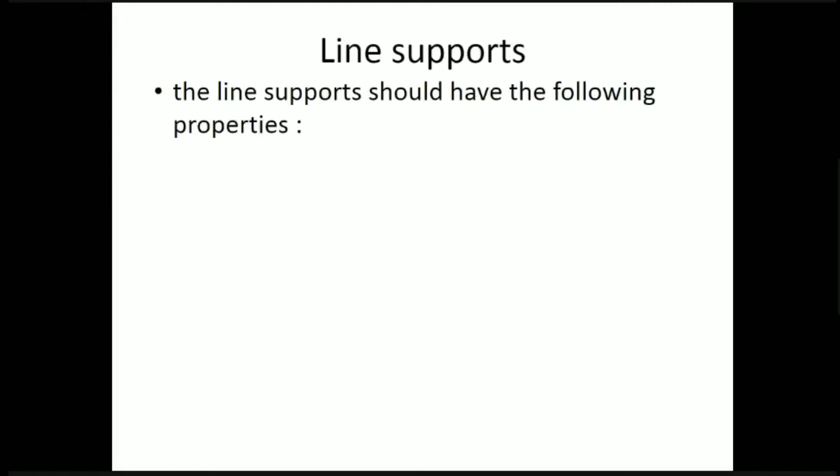Supporting structures are used for supporting the conductors in transmission as well as distribution system. The line supports should have the following properties.

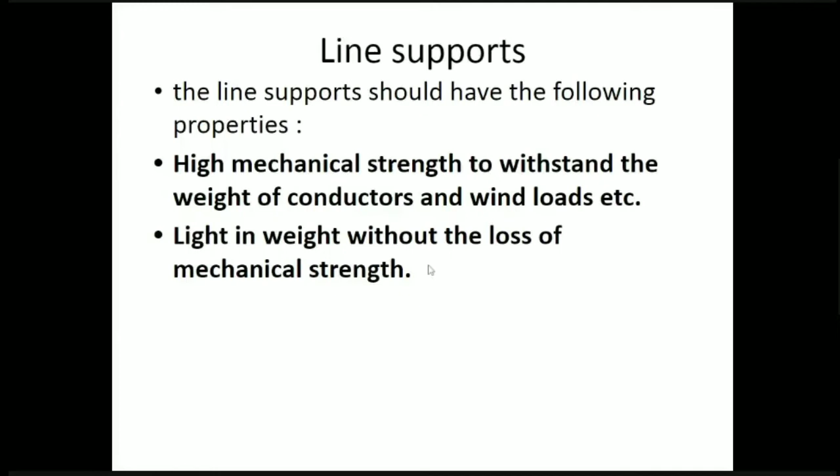High mechanical strength to withstand the weight of conductors, wind loads, insulators, etc. They should be light in weight without the loss of mechanical strength. They should be cheap in cost and economical to maintain. They should have longer life. They should be easily accessible for the maintenance of conductors. They should be good looking, with low maintenance cost.

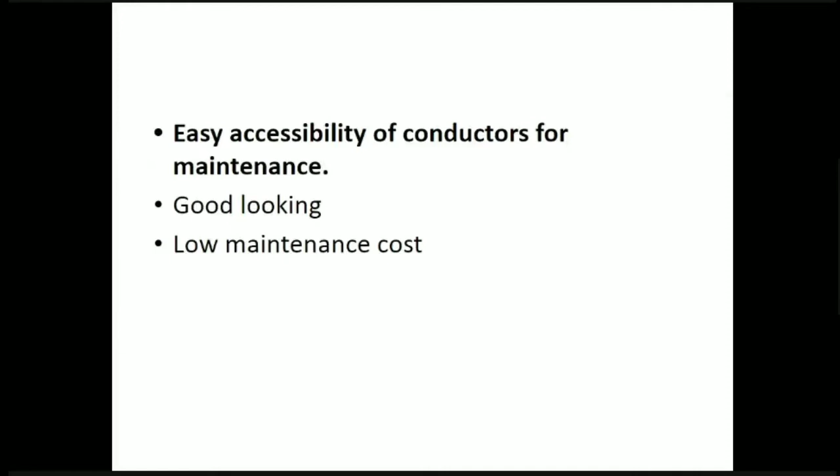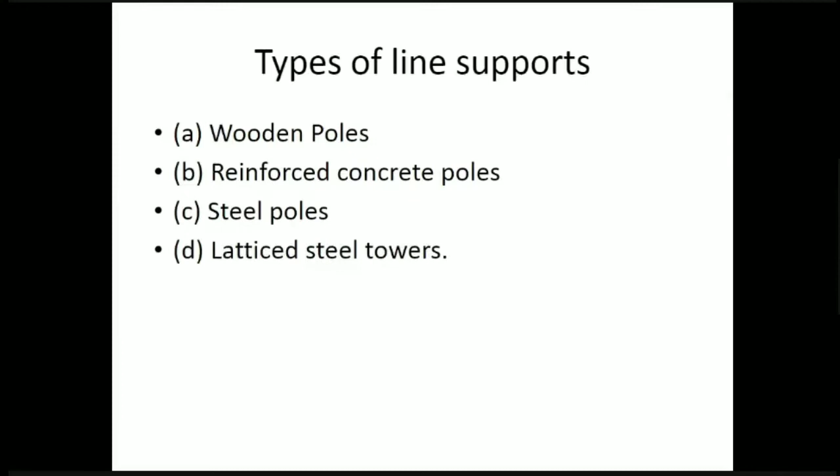And types of line supports. There are different types of materials used for line supports. First of all, wooden poles made up of wood. Then reinforced concrete poles, steel poles, and latticed steel towers.

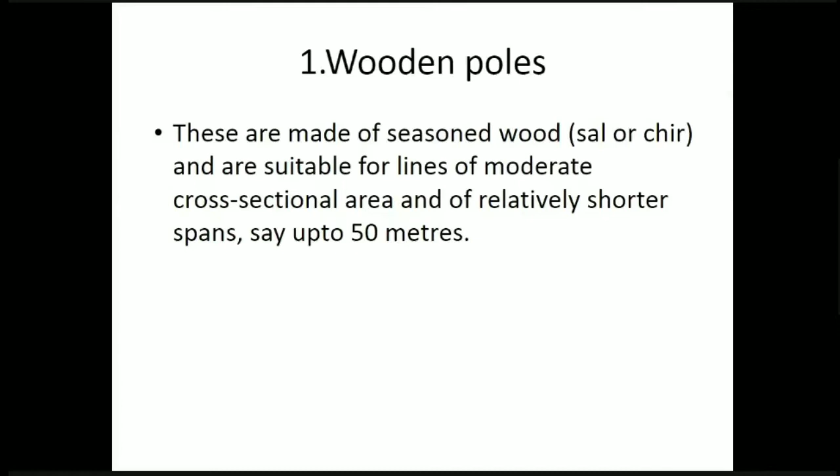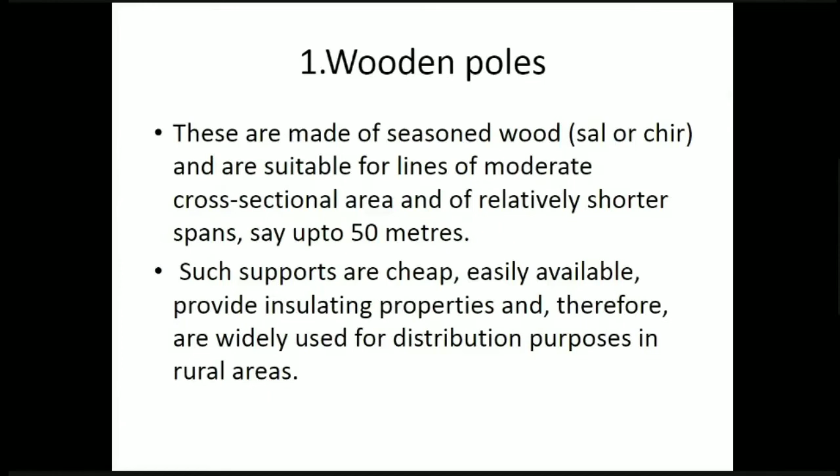First we shall see wooden poles. These are made of seasoned wood and are suitable for lines of moderate cross-sectional area and of relatively shorter spans, say up to 50 meters. Such supports are cheap, easily available, provide insulating properties, and therefore are widely used for distribution purposes in rural areas.

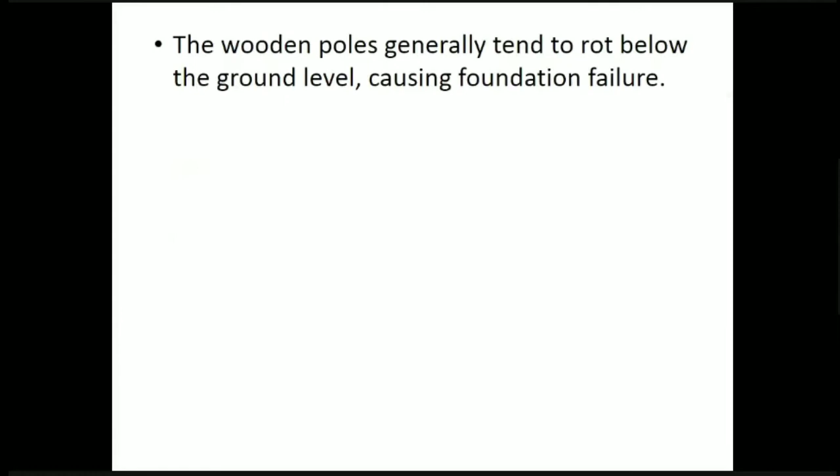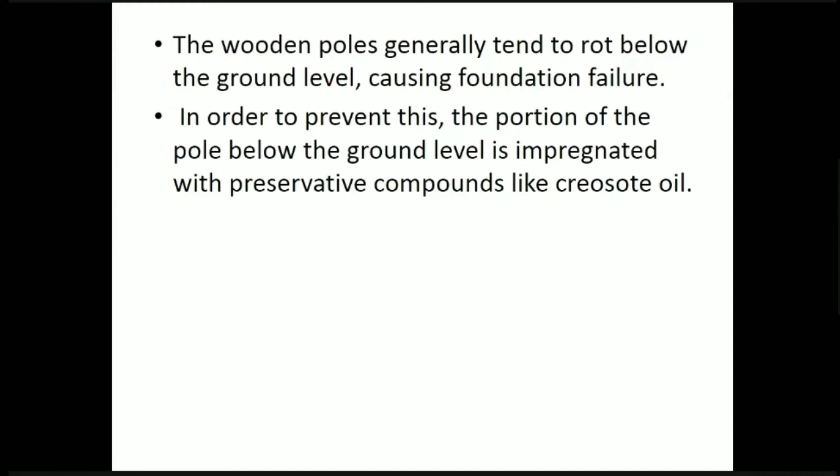The wooden poles generally tend to rot below the ground level, causing foundation failure. In order to prevent this, the portion of the pole below the ground level is impregnated with preservative compounds like creosote oil. Double pole structures of the A or H type are often used to obtain higher transverse strength than single poles.

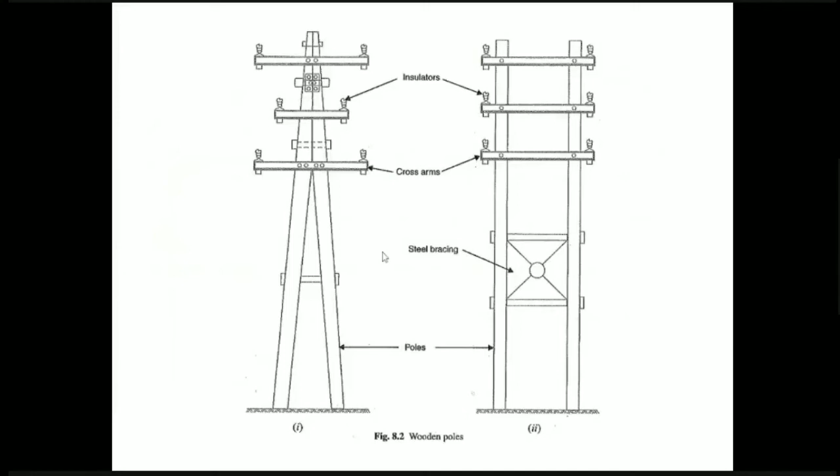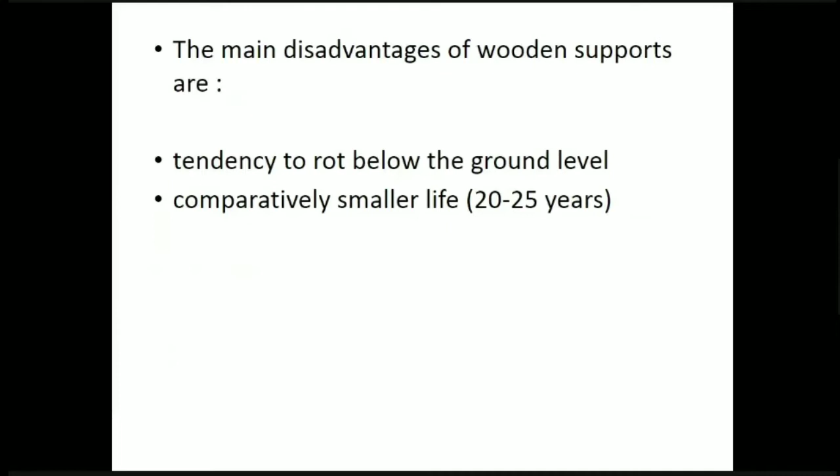The main disadvantages of wooden supports are the tendency to rot below the ground level, comparatively smaller life of 20 to 25 years, cannot be used for voltages higher than 20 kV, less mechanical strength, and they require periodic inspection.

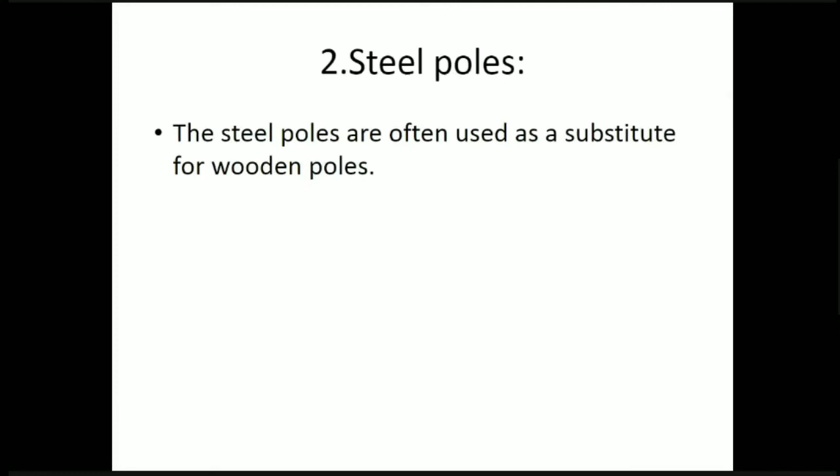The next type of poles is steel poles. The steel poles are often used as a substitute for wooden poles. They possess greater mechanical strength, longer life, and permit longer spans, that is from 50 to 80 meters.

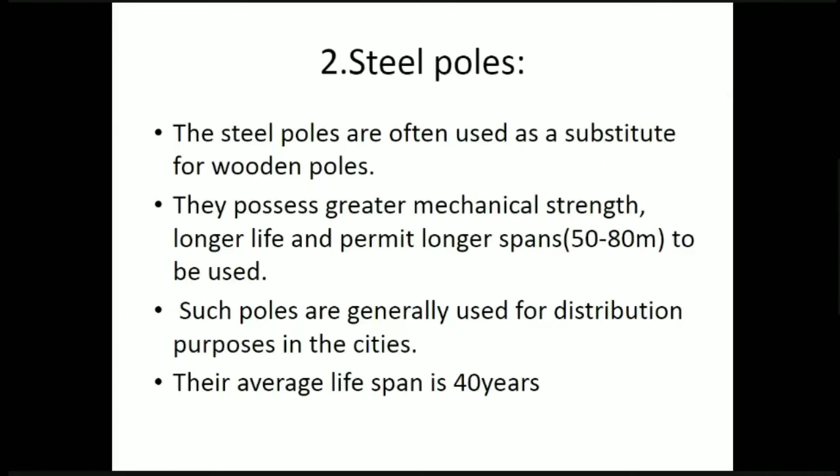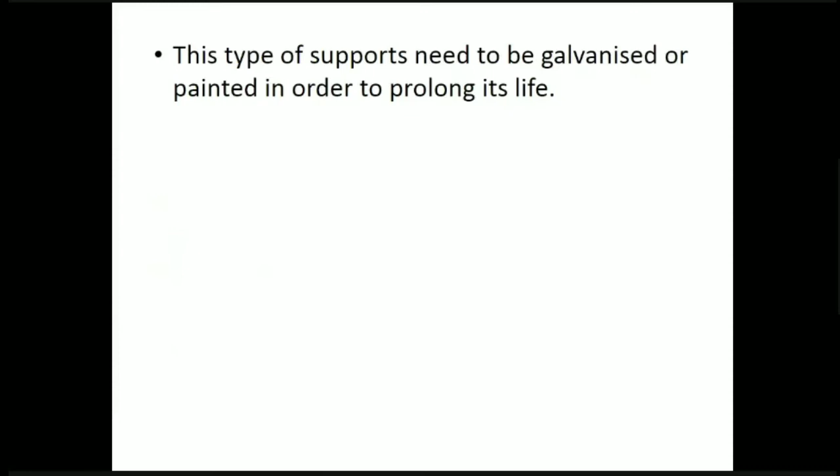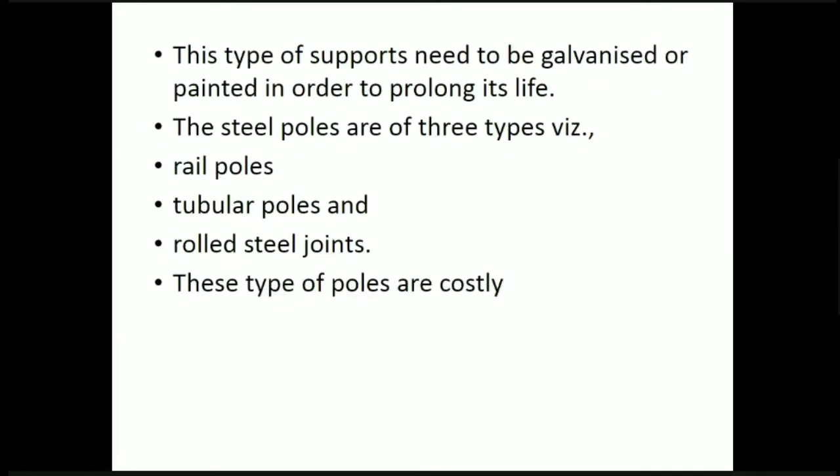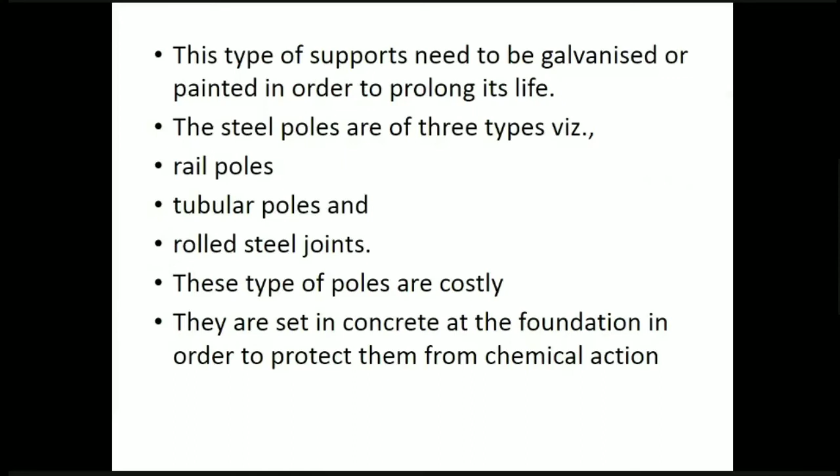The steel poles are of three types: rail poles, tubular poles, and rolled steel joints. These types of poles are costly. They are set in concrete at the foundation in order to protect them from chemical action. Below the ground level, the concrete may get damaged, so in order to protect that, concrete foundation is provided.

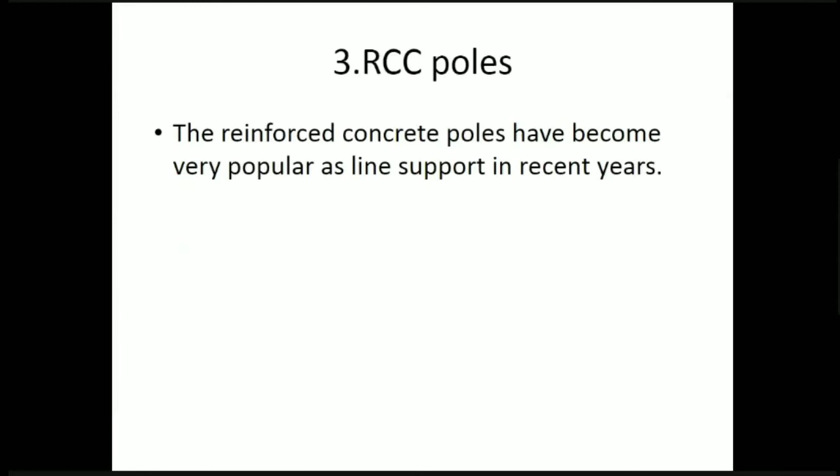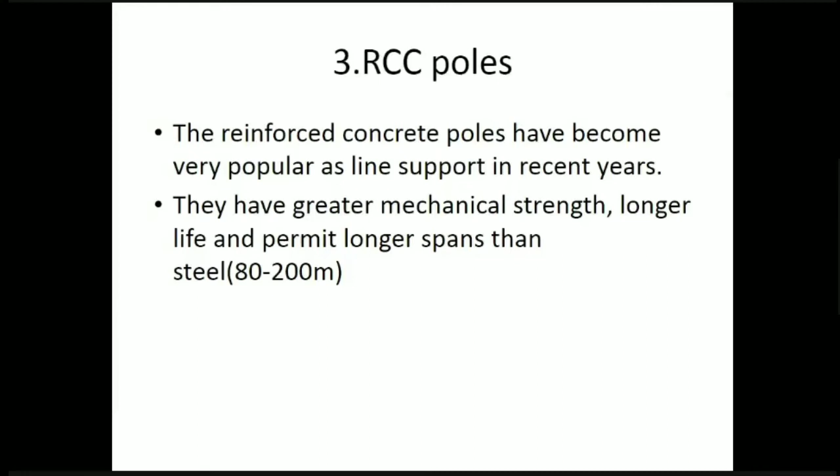The third type is RCC poles, reinforced concrete poles. They have become very popular as line supports in recent years. They have greater mechanical strength, longer life, and permit longer spans than steel, going from 80 meters to 200 meters. Moreover, they give a good outlook, require little maintenance, and have good insulating properties.

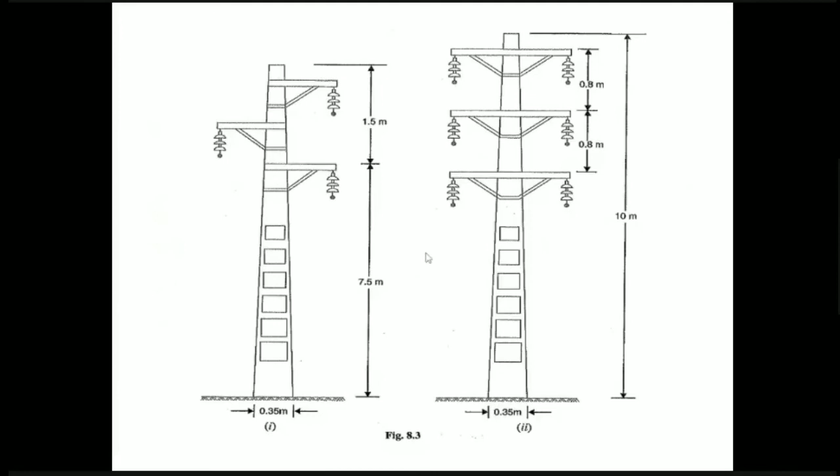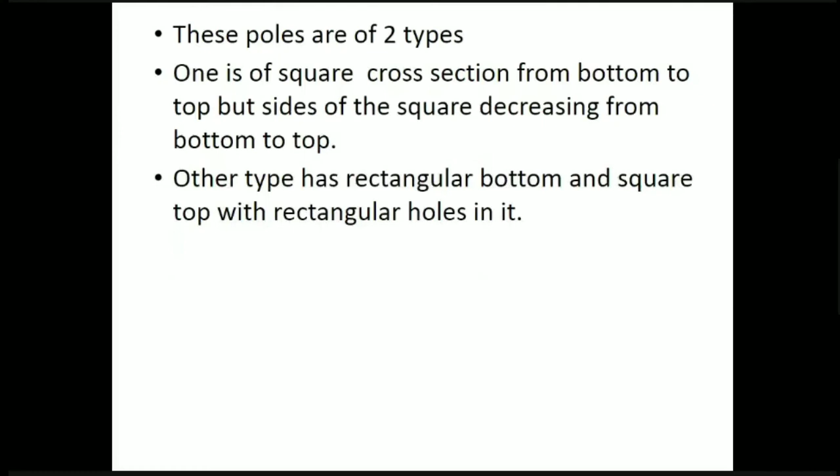This is the diagram of concrete poles. We can have single circuit as well as double circuit lines along with these concrete structures. These poles are of two types: one is of square cross section from bottom to top, with sides of the square decreasing from bottom to top. The other type has a rectangular bottom and square top with rectangular holes on it.

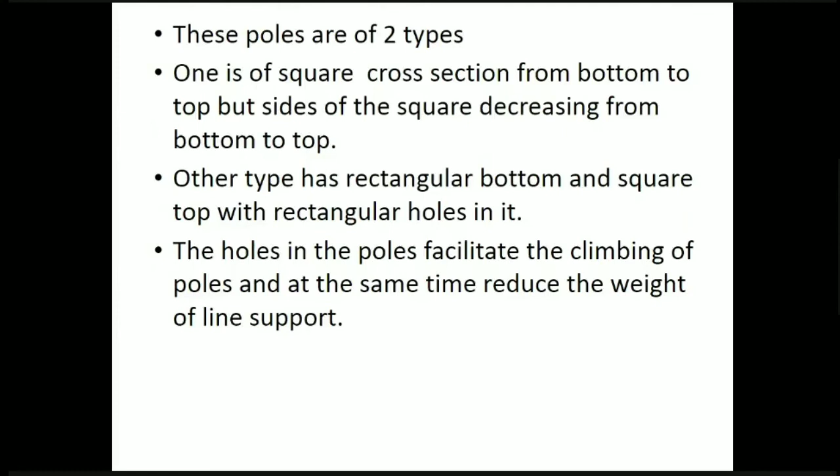The holes in the poles facilitate climbing of the poles and at the same time reduce the weight of the line support. The main difficulty with the use of these poles is the high cost of transport owing to their heavy weight. Therefore, such poles are often manufactured at the site in order to avoid heavy transportation costs.

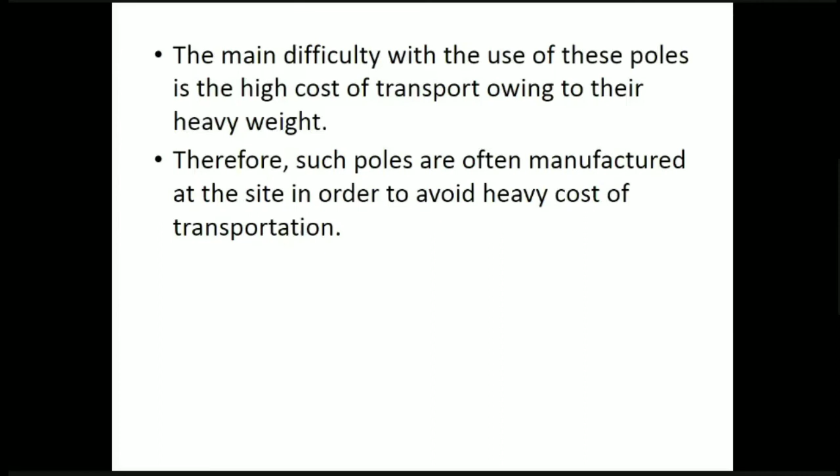The last one is steel towers. In practice, wooden, steel and reinforced concrete poles are used for distribution purposes at low voltages, say up to 11 kV. However, for long distance transmission at higher voltage, steel towers are invariably employed.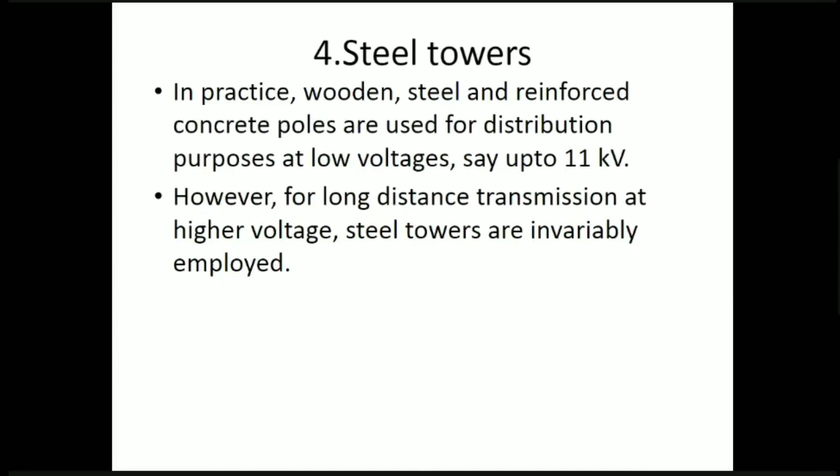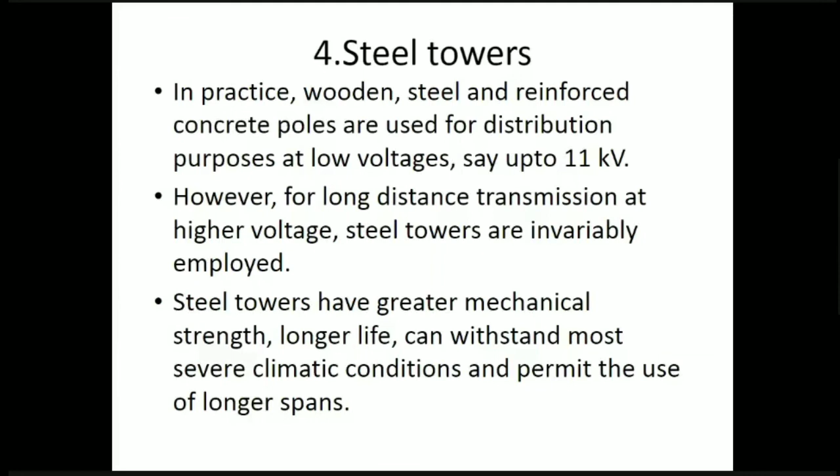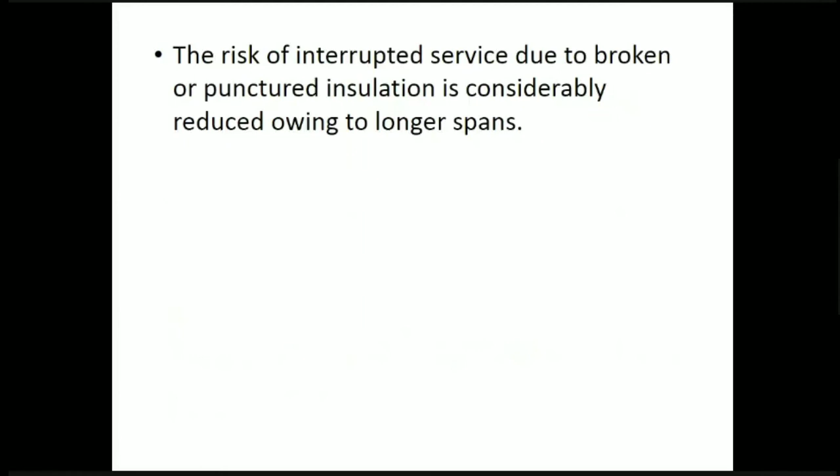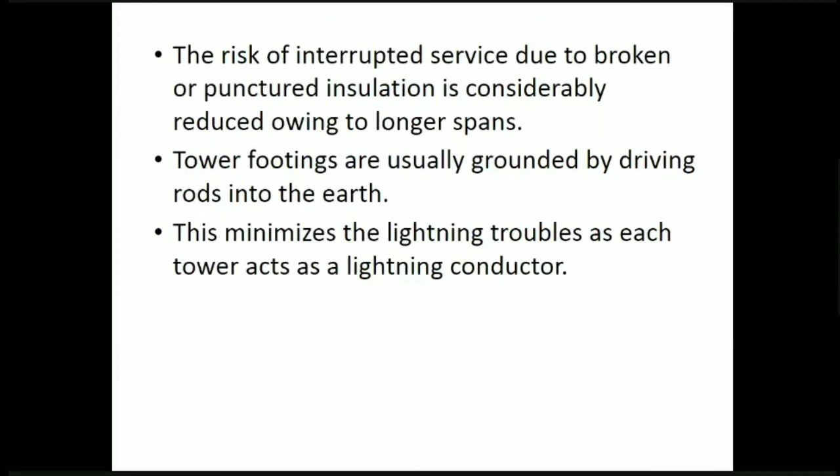They have greater mechanical strength, longer life, and can withstand more severe climatic conditions, permitting the use of longer spans. The risk of interrupted service due to broken or punctured insulation is considerably reduced owing to longer spans. Tower footings are usually grounded by driving rods into the earth. This minimizes lightning troubles as each tower acts as a lightning conductor.

This is the example of a steel tower. We can have single circuit as well as double circuit provided on either side.

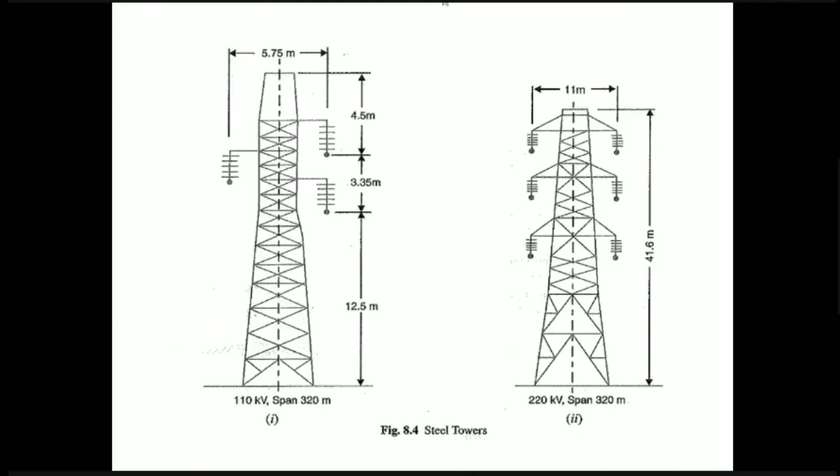So these are the different types of support structures used for power transfer. So we shall stop here. We'll continue with a new topic in the next class. Thank you.